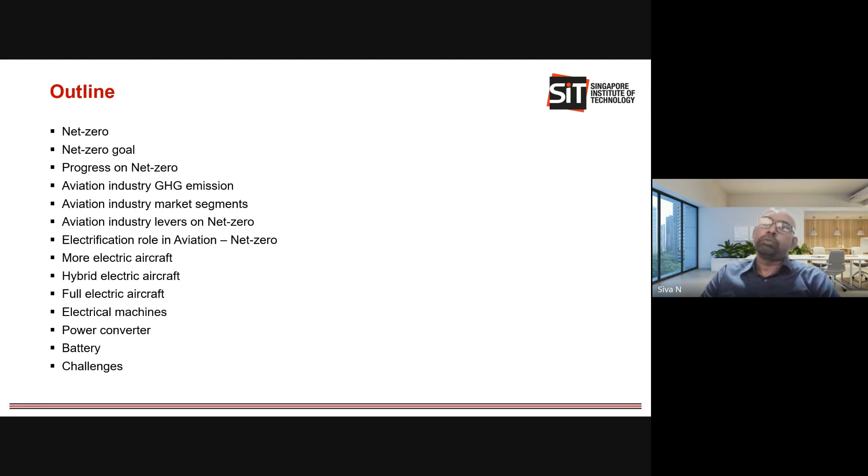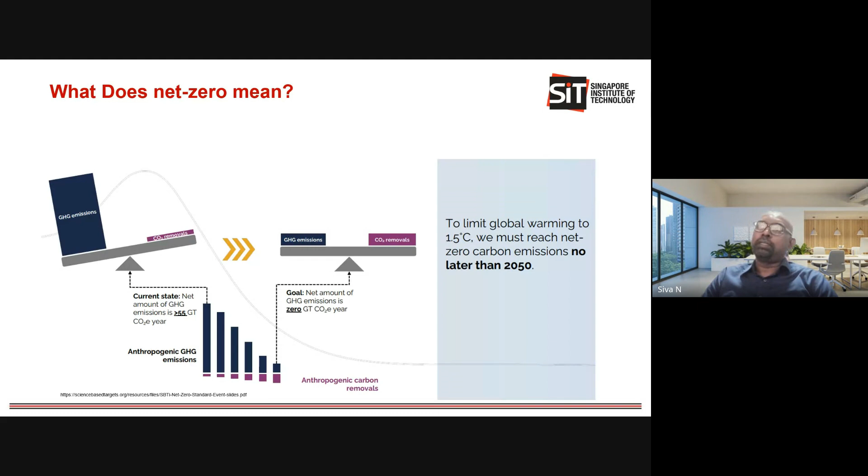Okay, so what does net zero mean? Net zero is basically, it's not really an initiative, it's kind of a pledge that countries, or globally, are being accepted to make. Net zero means the emission and the absorption are balanced.

So whenever I show this slide, I always use the analogy of a kitchen. Where we are now currently is somewhere here. If you look at the CO2 emission, the greenhouse gas emission is about 55 gigatons of CO2 equivalent per year.

So we are somewhere here. And then if you look at the amount of carbon being absorbed or removed from the atmosphere through natural means like the trees or forests that we have, it's very little actually. So the emission is really high, and the absorption or removal is really low. So this is a big imbalance that we have now.

So take an analogy: you have an enclosed kitchen with a small ventilation, maybe 10 centimeter diameter. And if you're using a wooden stove to cook your dish, when you burn the wood, what happens? It releases smoke, right? The rate of the smoke being released from the wood may be much higher than the rate the air is being ventilated through the hole. So eventually over the period, what happens? The kitchen is filled with more smoke.

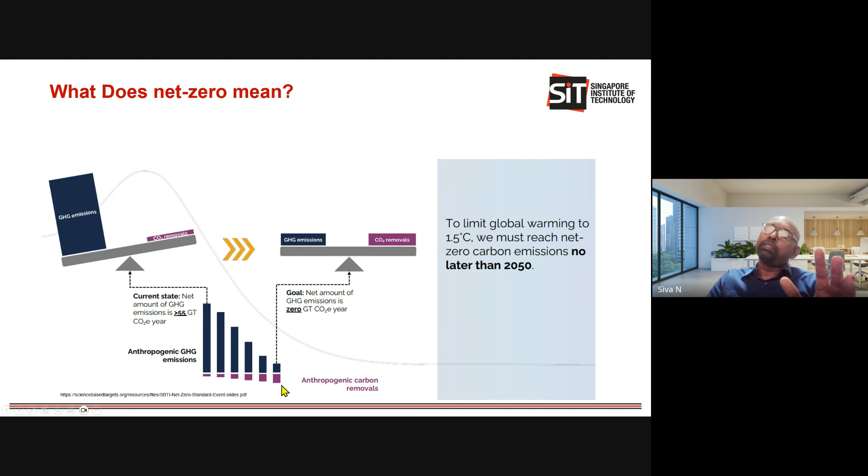So that's technology development: focus on technology to reduce CO2 emission, maybe by going to a completely different fuel or increasing the efficiency of the system. At the same time, also invest and focus on how we can effectively remove or accelerate the removal of CO2 from the atmosphere. So that's the transition we want to achieve in the next 15 years in order to strike the balance between emission and removal.

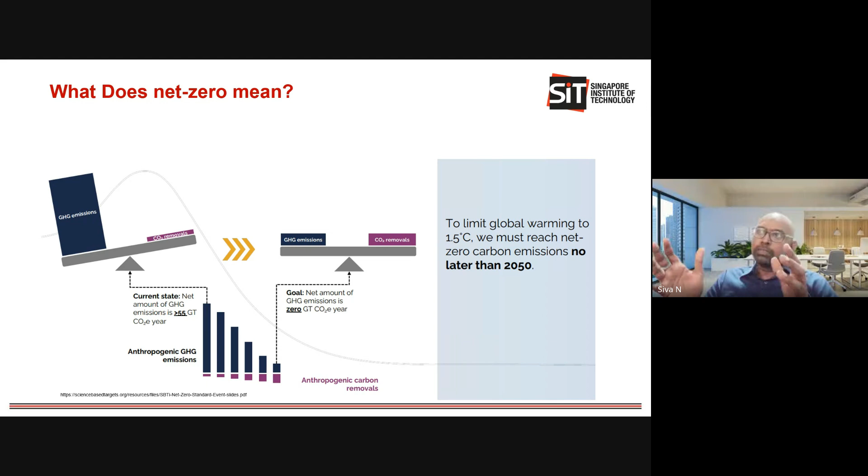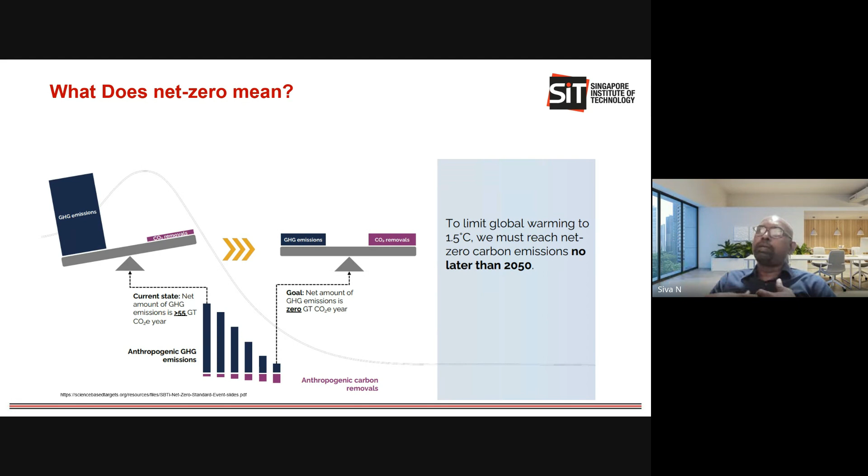Okay, so why are we doing this? Because we want to limit global warming to 1.5 degrees Celsius. Compared to the pre-industrial era, like 150 years back, the global temperature has already increased almost 1.45; I have a slide to show on that. If we're not taking any measures, the temperature rise would go higher and higher, maybe increasing by 2 or 2.5 degrees Celsius. That could create natural catastrophes that may be very harmful to the human race.

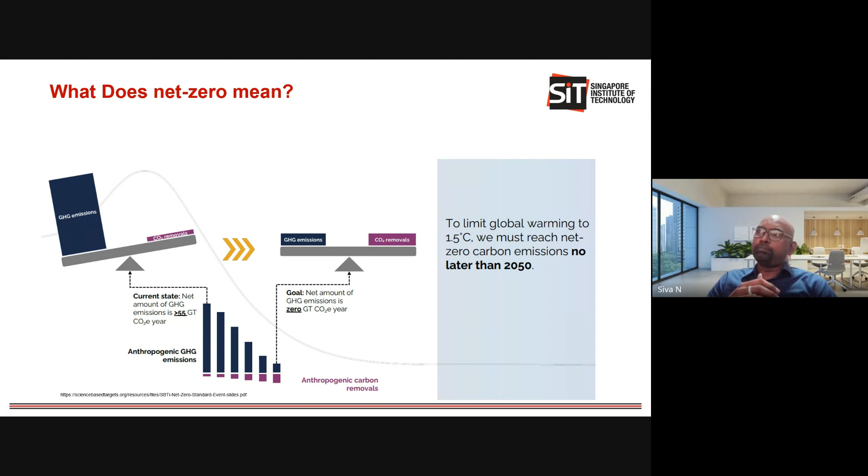So that's why, globally, countries have taken measures in order to achieve net zero by 2050, so that we can contain the increase in global warming to 1.5 degrees Celsius, so that we can prevent natural disasters in the coming years.

Okay, so the net zero pledge was taken in the Paris Agreement. It is actually an agreement that happened in a conference organized by the United Nations Framework Convention on Climate Change, which happened in 2015 in Paris. So that's why, in short, they call it the Paris Agreement.

So different countries and organizations came together and committed to address climate change collaboratively. And the aim, like I mentioned, is by the second half of the century to balance the greenhouse gas emissions and their removal from the atmosphere. So we want to strike the balance there. So the primary goal is to

limit global warming to 2 degrees Celsius, but 2 degrees Celsius is still harmful to the globe. So everybody is trying to focus on the stretch target, which is to contain the increase in global temperature, the global warming, to 1.5 degrees Celsius. So that's the target.

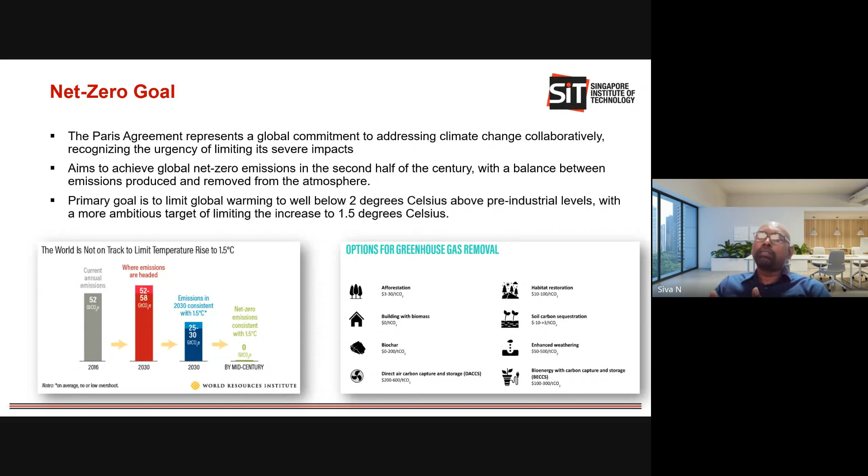One of the considerations to calculate the factor is what initiatives the company is taking for the environment. So if a company is not taking any initiative to achieve this net zero target, the ESG score is lower. If the score is lower, the company is categorized as not an investment grade company, so investors are not investing in those companies. They just try to stay away from them.

So in order to attract more investment, companies are trying to increase the ESG score. So they are looking at how they can contribute to the net zero target. So these are the reasons.

The other reason is a survey conducted on millennials, I think in the UK or somewhere. The millennials, the next generation workforce, are the ones going to contribute to society. And they say that if a company is not taking any measures on the removal of CO2 or not taking care of the environment, they're not interested in working for that company.

So it's alarming for industries and companies, because they see that if the new workforce is not ready to join them because they're not taking care of the environment, again, they see the downfall. So that's the other reason they want to give more focus to net zero. So these are some of the main key reasons, and there are many other reasons as well.

So if you browse any companies you're interested in or want to pursue a career with, go and read what their net zero goals are, and you can see there may be electrification. These are some of the things you should be aware of and know before you pursue a career in any industry or any company. Okay, so that's a brief background about why net zero and CO2 emission removal are important. You may be wondering, okay, on the previous slide I was showing, we have to strike a balance.

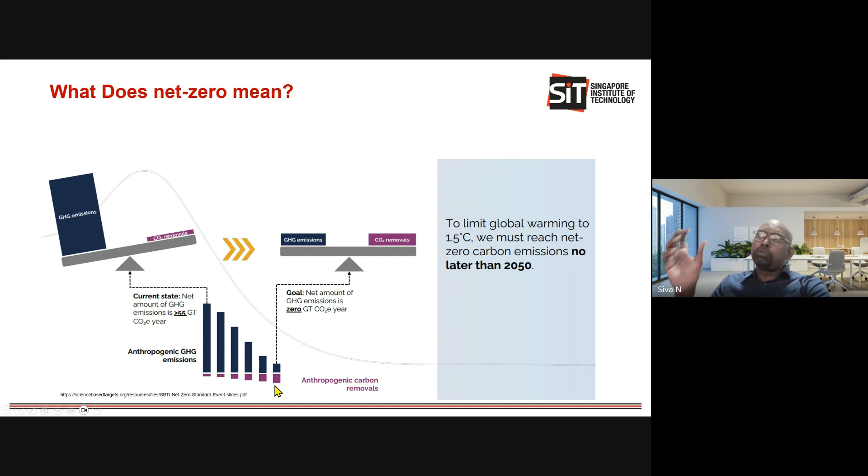So it's kind of going back to tradition. In the olden days, they used wooden materials to build houses. So using organic material in the buildings. We are basically putting the carbon in the building, and we are not releasing it to the atmosphere. And once the building is demolished, again, it's going to the earth. So you're keeping the carbon in the building itself; it's not being emitted to the atmosphere. That's one way. And another one is biochar.

Biochar is made when we burn organic material like wood at very low oxygen. The biochar is used to fertilize the land, or used as a catalyst, or used in filters. So it has many purposes. By converting the organic material to biochar, we are also reducing the CO2. So that can be a way of reducing or removing CO2. Instead of burning something and releasing the CO2, we are stopping that from happening. So that's considered a removal process.

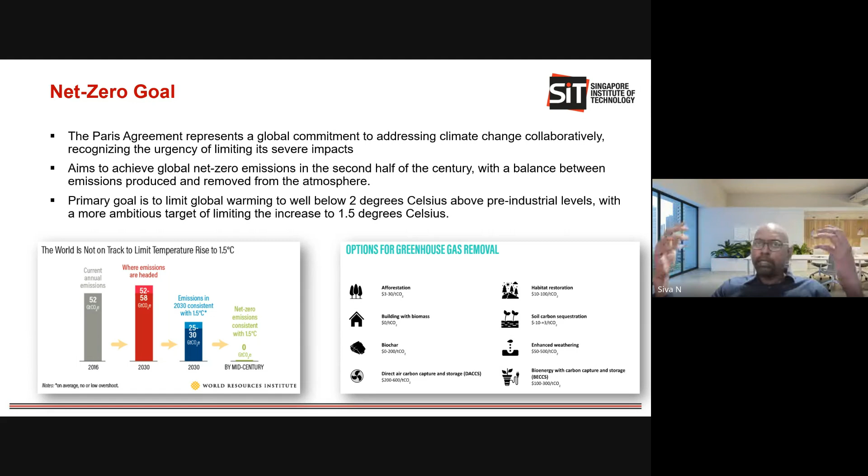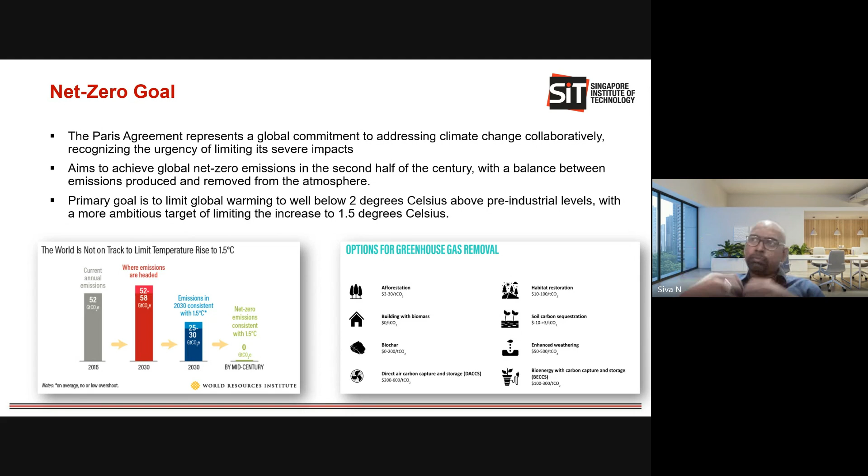And carbon direct air capture is a big topic again. There are many companies emerging now to increase direct air capture. In direct air capture, they put big fans to suck in air from the atmosphere, then they have a filter which filters out the carbon, and some solvent to dissolve the captured carbon. And this captured carbon is stored inside the earth. We drill a long hole and pump out petroleum to create fuel. This is a reverse process: they capture the carbon and pump it inside the earth and store it there.

So that's one way. Another way is bioenergy with carbon capture and storage. That is something like: capture the carbon, bring hydrogen molecules from the electrolysis of water, and combine the hydrogen and captured carbon to create a hydrocarbon chain, say a synthetic fuel, and then you can use it again. So that is another process.

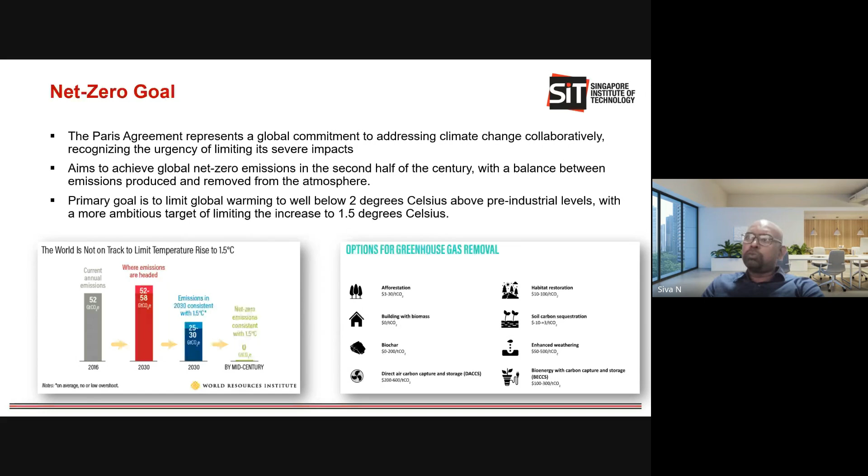And there are many other processes like enhanced weathering, where silicates and carbonates can absorb CO2 from the atmosphere. That's a natural, slow process, and the question is how we can accelerate the natural process of carbonates and silicates absorbing CO2. So these are different options available to remove CO2, and industries are looking into them to see how they can use them to accelerate carbon removal.

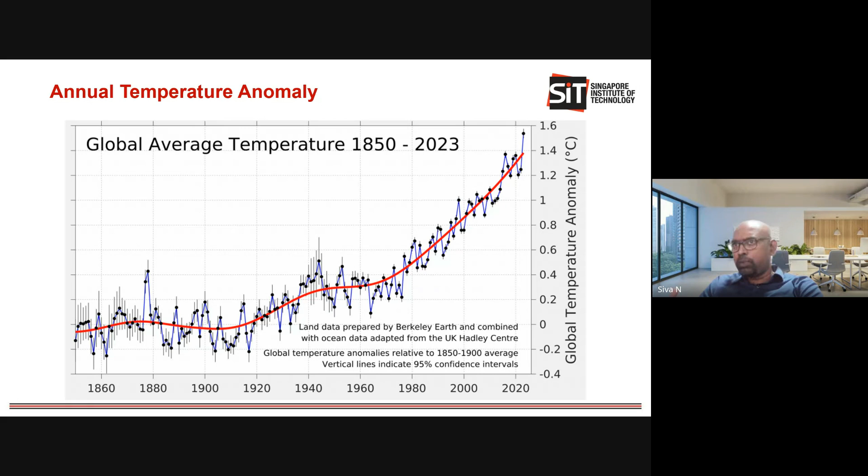So that's the reason that we are talking about this topic. Okay, so I explained why it is important and what the net zero target was, and now let's see whether it's important to achieving the net zero target, or whether the countries are serious about it.

Yes, as of June 2024, so far 107 countries, responsible for emitting about 82% of global greenhouse gas emissions, have already pledged to adopt CO2 net zero initiatives. You can see that there are many countries that already implement policies and laws to achieve this net zero target.

And some of the countries, our neighboring countries like Bhutan, claim that they are already net zero in the domestic sector. They already implemented policy documents to use only net zero fuel for domestic purposes. By doing that, they say that they already achieved net zero.

And Singapore, you can see, from all sectors except international aviation and shipping, wants to go 100% net zero by the second half of this century. So they already have policy documents in place. This is the government imposing policies to ensure that new vehicles, new means of generating electricity, or new means of operating equipment in industries reduce emissions. So the country itself is implementing laws and policies to achieve that, which is good.

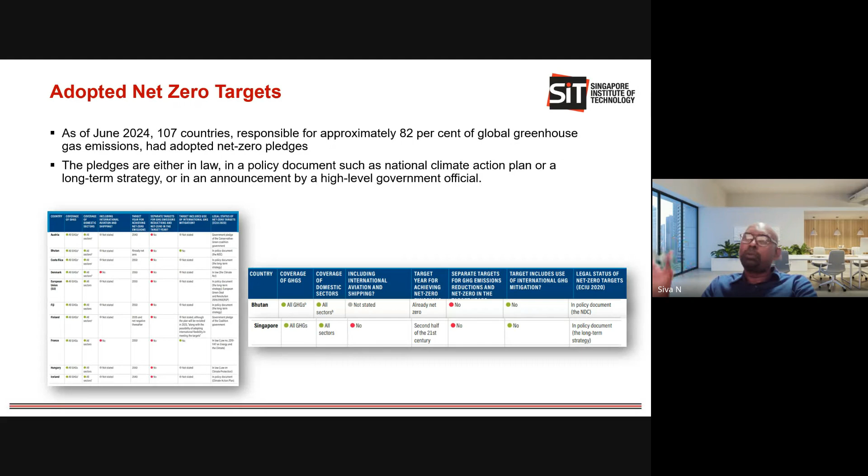So almost 80%, almost all the countries who contribute to CO2 have taken it seriously and are implementing policies, which is good. And to measure the progress, whether we are able to achieve net zero by 2050, they came up with 42 indicators to track progress toward the targets of 2023, 2030, and 2050. These 42 indicators are used to assess in what direction the globe is going to achieve the net zero target by 2050.

And if you look at these indicators, out of the 42 indicators, only one indicator is on the right track, which is the sale of electric vehicles. Whereas for the other indicators, some are in the right direction but off track, and some are in the right direction but well off track. It's very slow in meeting the milestones, basically. And some of them are taking a U-turn. They're going in the wrong direction.

For example, the carbon intensity of global steel production. Global steel production is supposed to reduce, because making steel uses a lot of energy, and most of it comes from fossil fuels. The milestone says global steel production must reduce CO2 emissions by this much, but actually it is increasing CO2 emissions compared to 2015. So that's why it says it is going in the wrong direction.

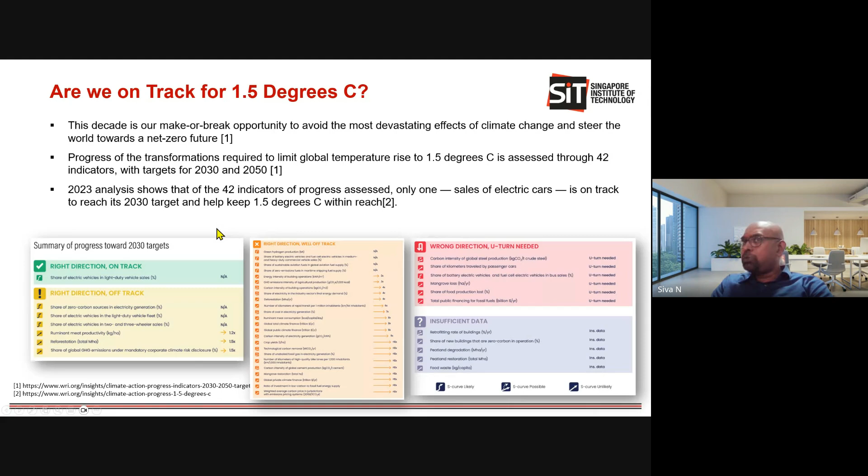So likewise, sometimes economic factors also drive this. So it's too hard to say who is right, who is wrong actually. So this is the status now. Out of the 42, only one milestone is on track, and the rest are either off track or, some of them, going in the wrong direction. So the next 15 years are very crucial to bring everything on track, and only if we bring it on track is net zero achievable by the middle of this century.

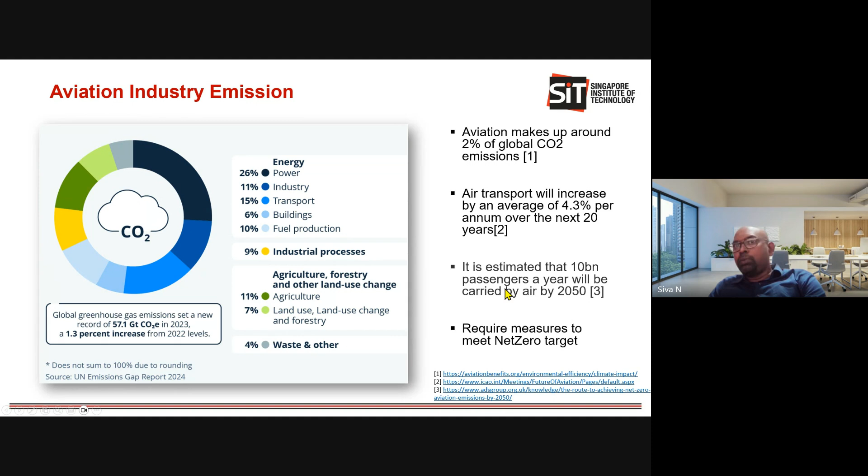It's important to look at what measures we can take to reduce emissions from the aviation industry and contribute to achieving the net zero initiative. It's estimated that about 10 billion passengers a year will be carried by air by 2050, a really significant number. The aviation industry is contributing 2% of global CO2 emissions, and that is going to increase as the growth of the industry is significant. So if you don't take any measures, aviation emissions will keep increasing, which is why it's important to take action.

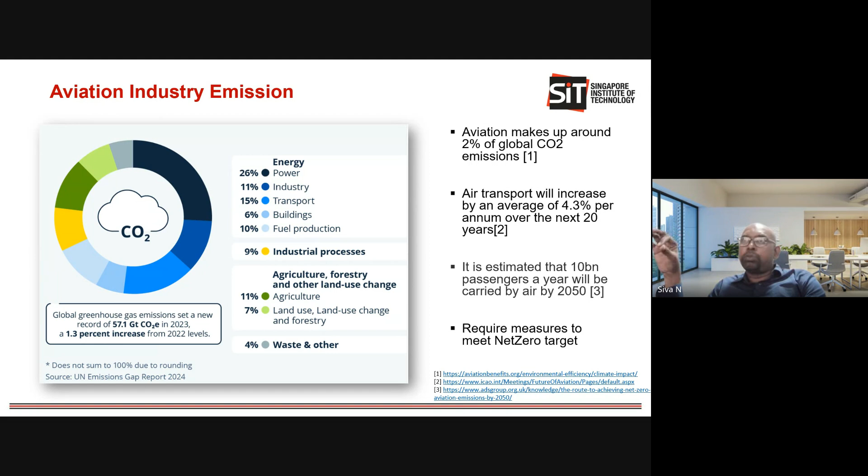Before looking at the measures the aviation industry has been taking in recent years, let's look at how the industry is categorized by market segment: UAM, commuter, regional, medium haul, and long haul flight. This is based on the size of the aircraft and the number of passengers it carries. The market uses this segmentation because the market is different for each of these categories, and the players—airlines and the OEMs supplying parts—are also categorized accordingly. This isn't fixed; some use four categories, some use five. Here I've taken the five-segment approach.

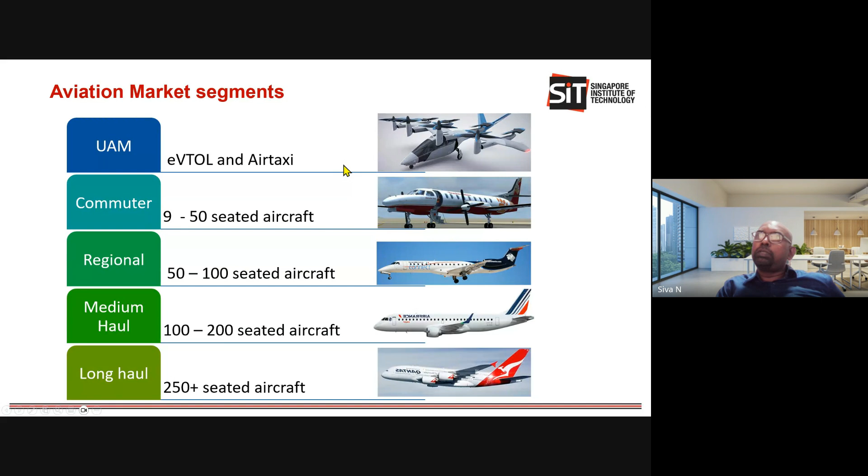eVTOL and air taxi represent a kind of emerging market now, whereas the others have been around for quite some time. Now let's see what initiatives have been taken to achieve this net zero target by UAM, commuter, regional, and medium and long haul flights.

To achieve net zero, there are measures—basically levers. The first is innovation with technology: adapting emerging technology to change how the industry operates, or how technology is used in aircraft to increase efficiency. Basically the focus is on improving fuel efficiency and adapting different sources for generating thrust, so that thrust can be generated with lesser or no CO2 emission. These are the kinds of technologies being looked into to reduce emissions.

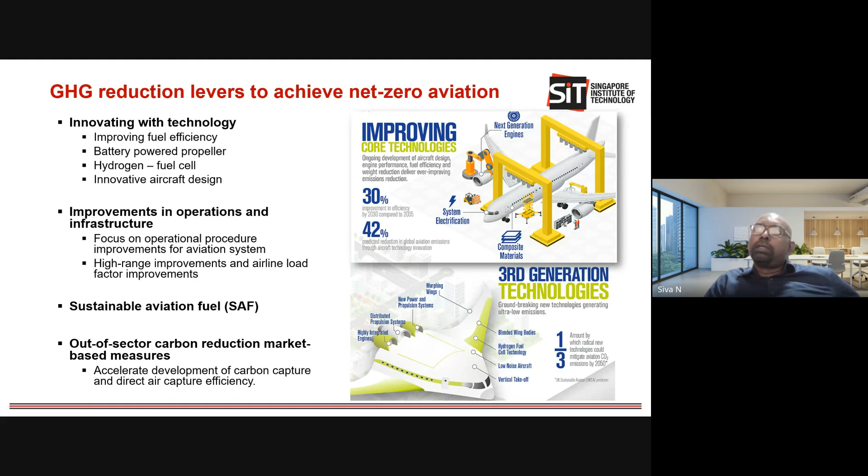The other lever is improvements in operations and infrastructure—an operational focus. If an aircraft is flying with fewer passengers, it's not generating revenue and isn't being fully utilized. If it's not fully utilized, the CO2 emission per passenger is higher. So one focus is improving the scheduling of aircraft so flights are fuller, improving utilization to reduce fuel burn per passenger. Another initiative is airlines coming together to share passengers and aircraft, increasing the utilization of their infrastructure.

Sustainable aviation fuel is another big topic, because long haul flights can't be 100% electrified. So we have to do something with the fuel so it emits less CO2. This sustainable aviation fuel is a big topic by itself—there are various fuel options to achieve net zero, like using feedstock such as biomass or palm oil to create fuel. If you get fuel from plants, the plant absorbs CO2, and when you use that as fuel and emit CO2 back into the atmosphere, the plant absorbs it again—a carbon neutral cycle. That's one way of using biomass.

Another approach uses electrolysis, like the Fischer-Tropsch approach: using fans to capture carbon from the atmosphere, then using renewable electricity to break down water into hydrogen and oxygen molecules, and combining the hydrogen and carbon to make a hydrocarbon chain to create a synthetic fuel. There are many methods that fall under sustainable aviation fuel.

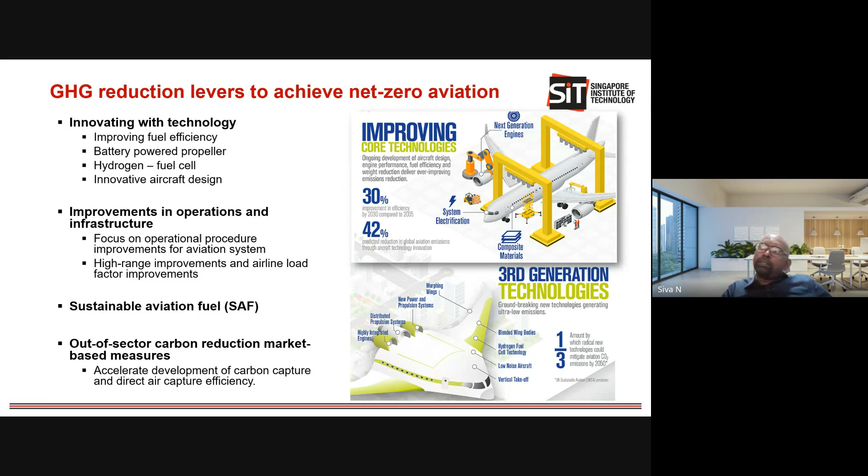That's a big topic by itself, I'll talk about this a bit later. There's also the out-of-sector carbon reduction market, kind of a carbon credit sort of thing. So whether airlines can invest in carbon capture or direct air capture technology to increase efficiency, so the amount of carbon they emit can be captured back, either putting it in the ground or using the carbon to do something useful. That helps to neutralize the carbon.

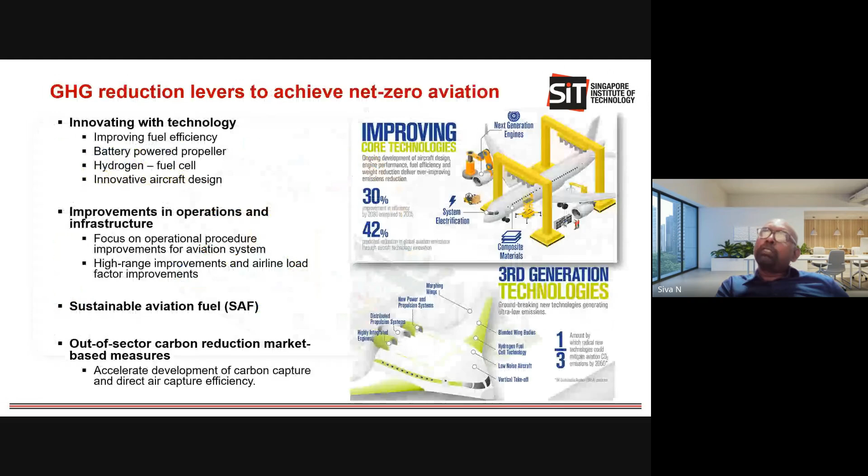So this is a passive approach, whereas these others are active approaches of reducing CO2 emission. Now let's look at this in more detail. The first approach is innovation, innovating with technology. So what innovations have been looked at?

If you look at aircraft, the fuel consumption is based on its weight. So by reducing the weight of the aircraft, you need less fuel to fly it, which increases the fuel efficiency. The industry is looking at composite materials to make the aircraft body lightweight, and by making the body lighter, we need less fuel to fly, increasing fuel efficiency.

Then electrification plays a significant role, because hydraulic and pneumatic systems are widely used in aircraft, and these add weight. By replacing hydraulic and pneumatic systems with electrical systems, we would be able to save weight and space in the aircraft. If we save space, we can accommodate more passengers.

So these are some of the measures, and also next generation engines. Engine manufacturers like Rolls-Royce, GE, Pratt & Whitney are investing a lot of money on improving engine efficiency. For example, if they increase engine efficiency by 1%, that creates savings of millions of dollars for airlines per year, per aircraft potentially, leading to significant savings on fuel burn.

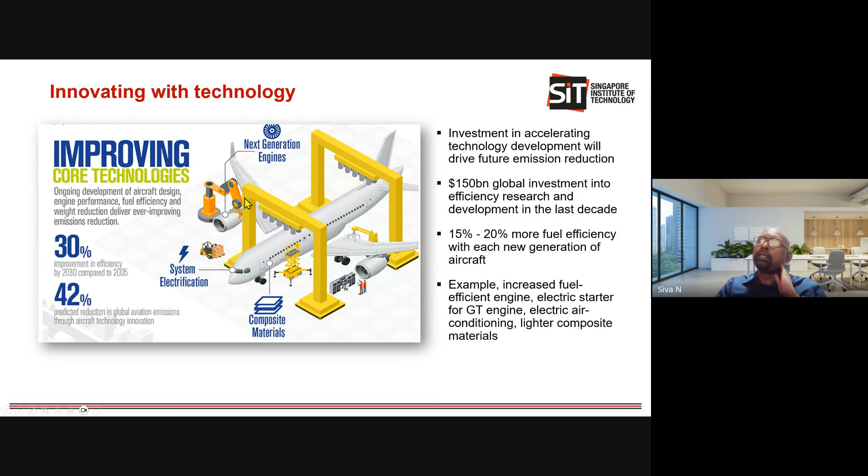Now, as most of us are electrical engineers, let's see how electrical technology is contributing in achieving net zero in aviation.

But still, it's really significant. We cannot have carbon capture technology to absorb this much CO2. So we have to reduce it.

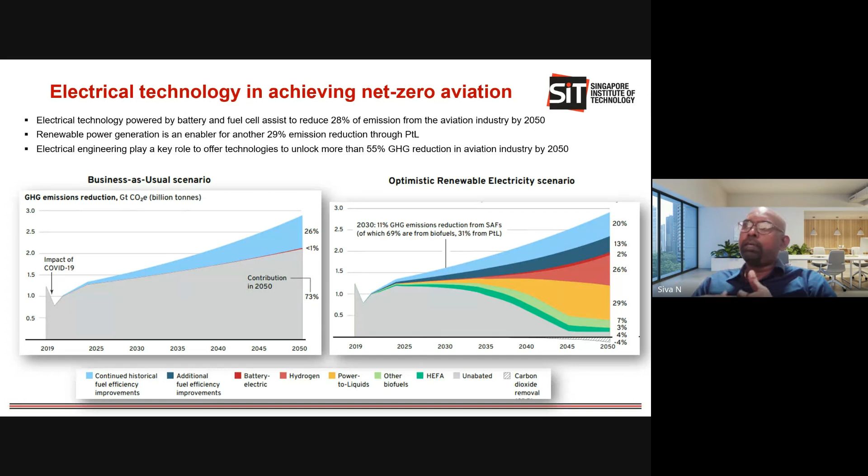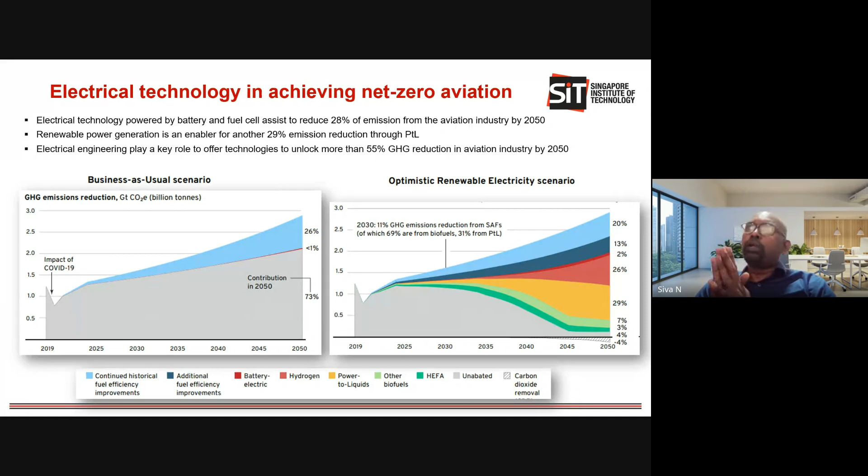So as electrical engineers, we have a big role to play here. We have to either contribute directly by replacing conventional combustion engines with electrical propulsion for battery or fuel cell aircraft, or by increasing the efficiency of existing aircraft by adapting more electric technologies—I'll talk about that later—by replacing some existing systems like hydraulic and pneumatic ones, or by making a significant contribution to increasing the production of renewable power. Only then is it all possible. So electrical engineering is going to play a significant and crucial role in unlocking 55% of the global greenhouse emission reduction in the aviation industry by 2050.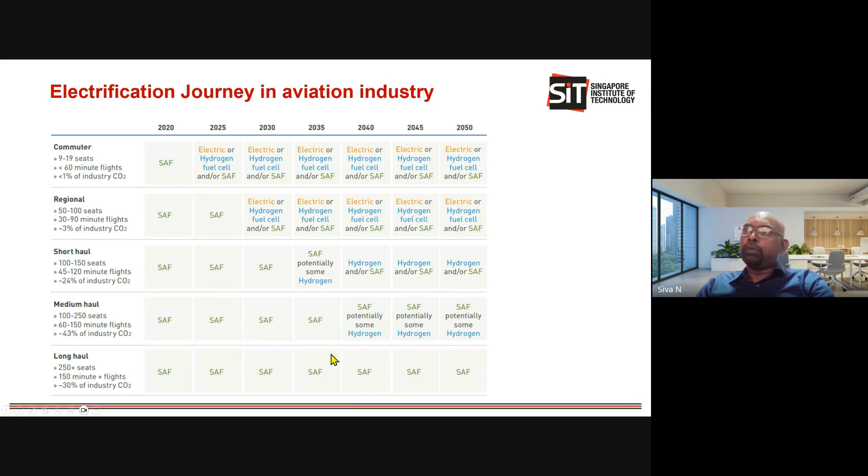Regional aircraft, which are slightly bigger, may be able to use hybrid electric and fuel cell technology to fly. This may happen from 2030 onwards. Then short haul, medium haul, and long haul aircraft will need to rely on sustainable aviation fuel and hydrogen—here electrification helps a little, but not significantly. We have to rely on sustainable aviation fuel or hydrogen as fuel to achieve that, whereas for commuter and regional aircraft, electrical propulsion is going to play a significant role in reducing carbon emissions.

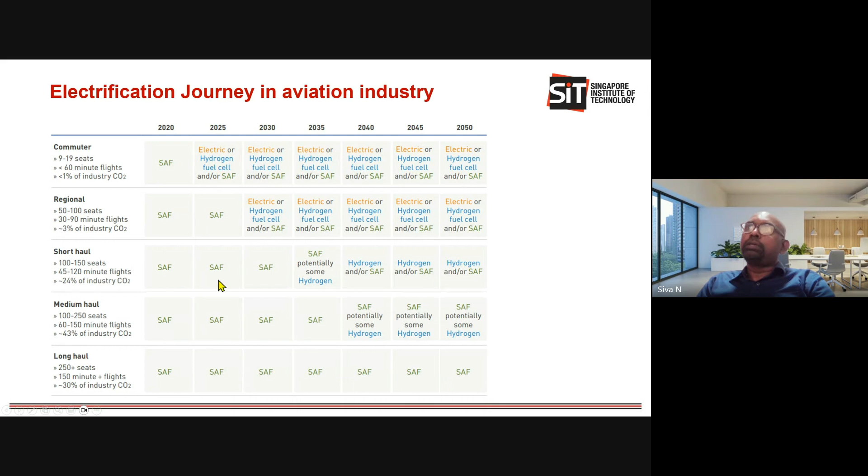So for aircraft electrification—how electrical technology or electrical engineering is going to assist in reducing emissions across all market segments of the aviation industry—let's take the more electric aircraft concept. This is mainly for long haul or medium haul aircraft, which are bigger aircraft that fly from one continent to another. These aircraft are huge, and it's difficult to completely change them to full electric or hybrid electric.

So here what we can do is replace some of the hydraulic and pneumatic systems with electrical ones. For example, in the gas turbine engine there are many stator vanes in the compressor and turbine blades, and the angle of attack for those blades needs to be adjusted. For that, they use hydraulic actuators. There are many initiatives in industry to replace this kind of system with electric.

And the other approach is to start the aircraft electrically. I think I have the slide here—maybe I can move to that slide. Yeah, more electric aircraft.

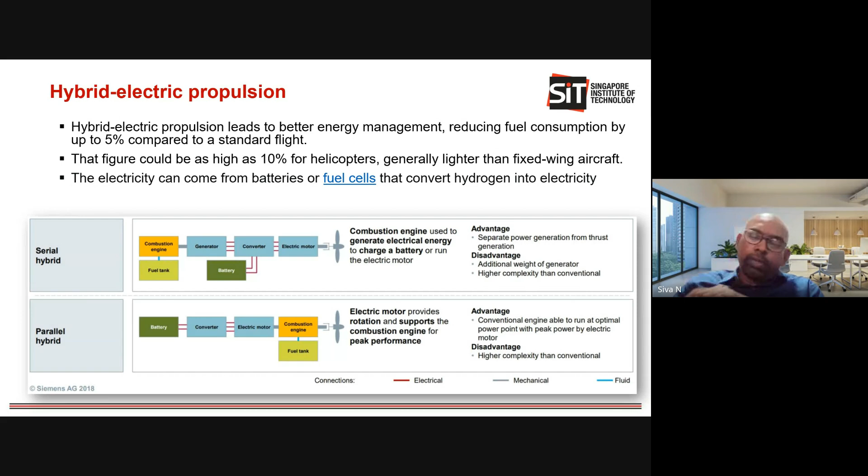And then again, two categories of the hybrid system: serial hybrid and parallel hybrid. In serial hybrid, the motors are used for propulsion, and the engine is used for generating electricity, and the motor is powered by the electricity generated by the engine as well as the battery. In parallel hybrid, the combustion engine is the primary source of power, and the electrical motor is used to provide additional torque to the combustion engine to generate more thrust to fly. Okay, so that's the hybrid option, and these are some of the demonstrators.

So companies like Airbus, Rolls-Royce, and Siemens all came together to build this demonstrator. In this demonstrator, Siemens provided the motor and the power converters for the propulsion. Rolls-Royce is good at designing engines, so they provided the small gas turbine engine, primarily to generate electricity. That drives the 2 megawatt generator, and they also provided the power converter. And Airbus provided the cockpit HMI, the control system, battery, and so on.

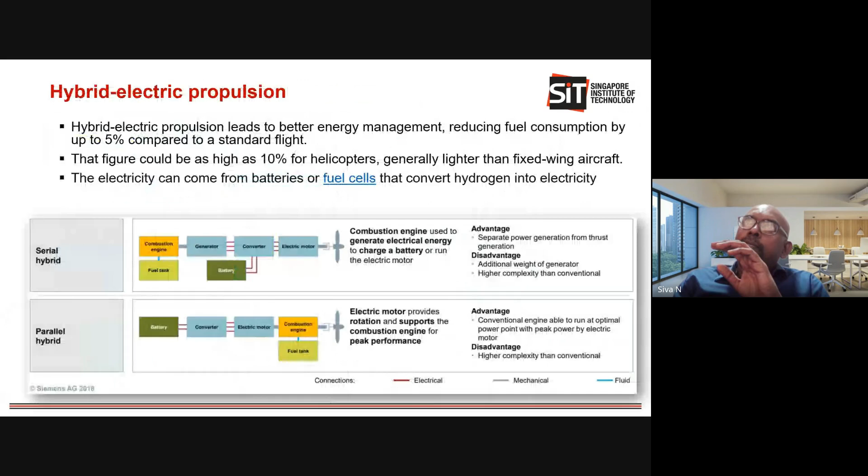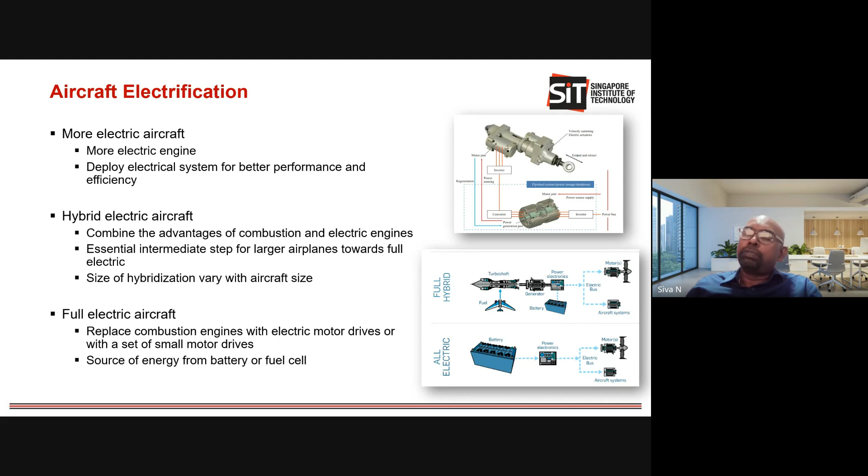And then, the third category of focus is, let me go back to the slide. Yeah, so I talked about the more electric aircraft, how electrification helps increase efficiency and reduce CO2 emissions. For hybrid electric, I talked about the companies coming together and demonstrating the concept, which will contribute to 5 to 10% fuel savings. And then full electric aircraft, that's what we're going to talk about.

The full electric aircraft is mainly for the urban air mobility industry, for the air taxi, which flies about a 35 to 100 kilometer range with 6 to 10 or 12 passengers. That is the urban air mobility market. Because with existing technology, we are only able to 100% electrify these aircraft, not the regional aircraft where 90 or 100 passengers travel, or the long-haul aircraft where 200 or 300 passengers travel. So with current battery technology, we would only be able to fully electrify small aircraft.

Okay, so why? This is again a big topic. Urban air mobility is an emerging topic, and it's been in the spotlight for the last 5 years. The reason is that the United Nations predicted that by 2050, 2/3 of the world population will live in cities. You can imagine that even now the cities are really crowded, and during peak hour, land transport is crowded and congested. So the infrastructure is really stretched.

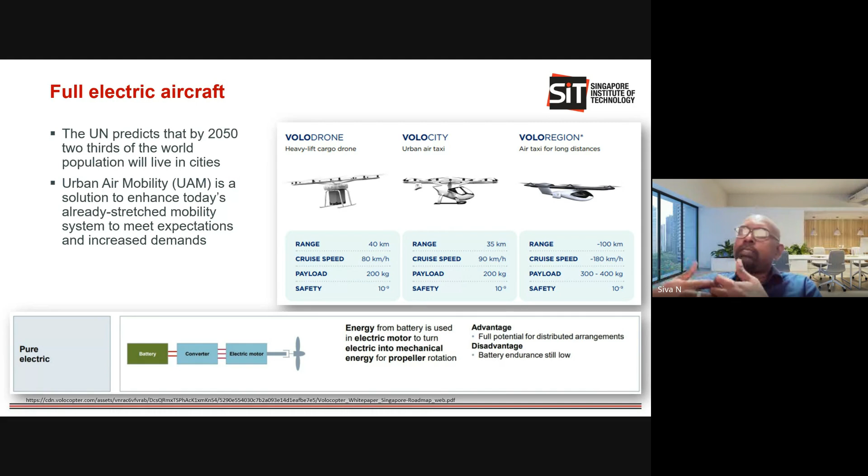So imagine that in 15 years, more and more people are migrating to the city, and the city is going to get really crowded. The land transportation is already stretched, so we have to look at the alternate option. The alternate option is the air taxi. There's a belief that this air taxi market is going to boom in the next 15 years. That's why many companies and startups are looking to develop electric air taxis for urban air mobility.

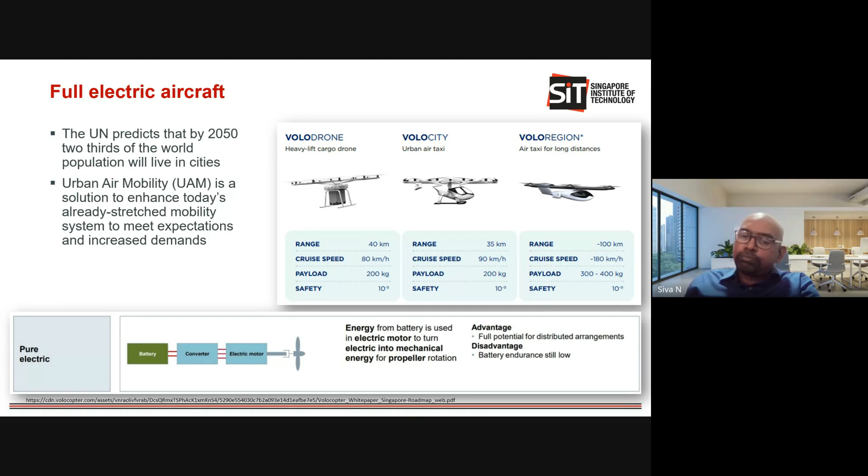Okay, so if you look at the full electric aircraft, the three key components are the electrical motor, converter, and battery. Electrical machines in general can achieve more than 95% efficiency, compared to the combustion engine, with efficiency of around 50% or below. So electrical motors are definitely efficient, but aerospace applications always have constraints. The two key constraints are weight and space. So, weight constraint: how we can reduce the weight of the electrical machine.

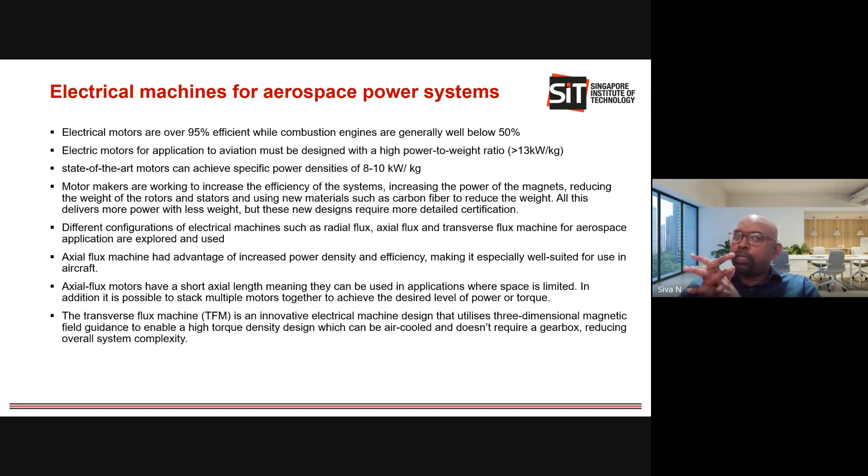So that's a primary focus on selecting or building the electrical machine for the aerospace application. Currently, the state-of-the-art motor can provide a power density of 8 to 10 kilowatts per kilogram. But if you want to use electrical motors for aerospace applications, the power density should be in the range of more than 13 kilowatts per kilogram. So that is like a 30 to 50% improvement in power density required.

So the industries, as well as the main OEMs, the original equipment manufacturers, are looking at various options of increasing the efficiency and power density of the machine, the motor. They're looking at technologies like increasing the power of the magnet, reducing the weight of the rotor and stator by using new materials like carbon fiber, and also other options like the machine topology itself. The radial flux machine is what is widely used. Can we go with other options like the axial flux machine and transverse flux machine?

The axial flux machine has various advantages. In the conventional machine you have a fixed stator and fixed rotor, whereas in the axial flux machine, if you want more power, we can stack the rotor and stator stages, right? So that provides modularity. If you want to increase the power, you can do it by stacking and adding rotors. It also reduces the weight of the machine.

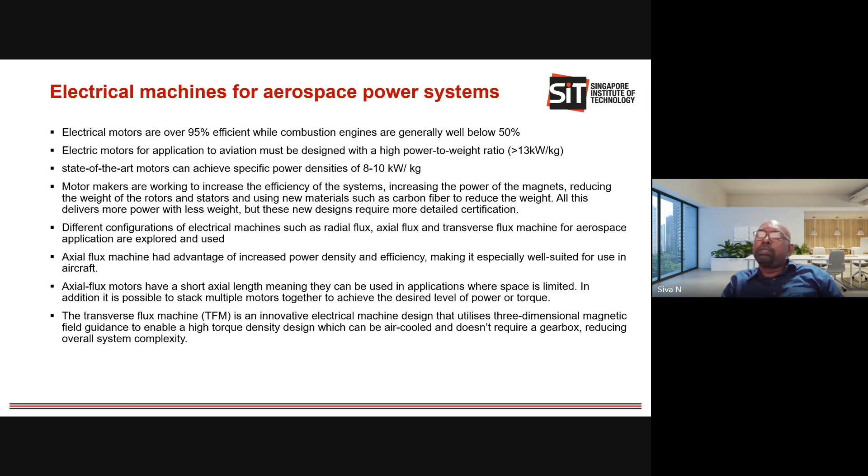Axial flux machines are currently being designed and developed, and some manufacturers already claim they have a product suitable for aerospace applications. The other configuration is the transverse flux machine. In the axial flux machine, the flux is in the axial direction. In the radial flux machine, the conventional, widely used machine, the flux goes in the radial direction. But the transverse flux machine's flux is a combination of radial and axial, which provides a three-dimensional magnetic field.

The advantage of this is that the windings can be exposed in this machine configuration. They don't need to be inside the stator slots. If they are exposed, they are easy to cool. Because when it comes to the power density calculation, they also consider the cooling. For example, you have a very high power dense electrical machine, but if this machine is liquid cooled, the power density calculation counts the machine weight as well as the coolant, cooling pipes, and cooling system weight, everything put together.

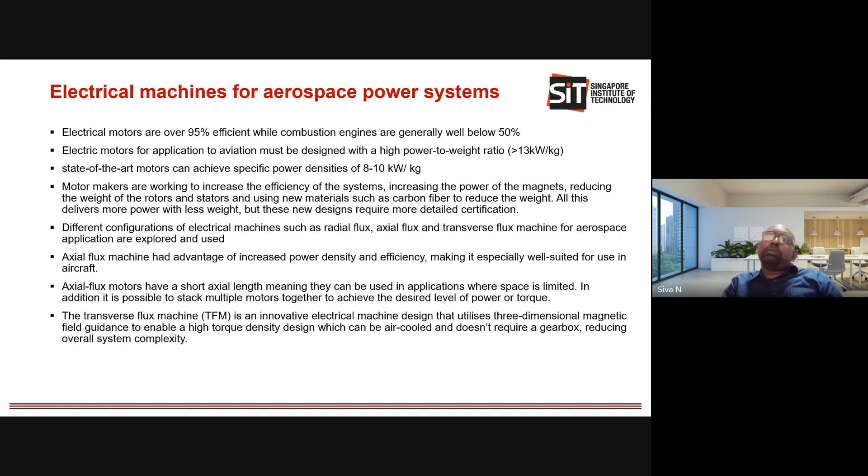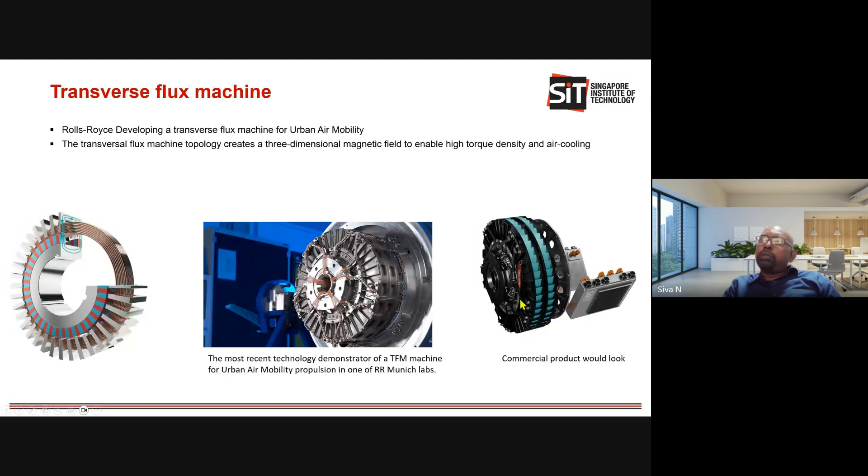So even if you develop a high power dense machine, when you include the accessories or the cooling system weight, the power density is reduced. If you use an air-cooled machine, the power density can be maintained or increased. That's the advantage of the transverse flux machine. This is the transverse flux machine currently being designed and developed by Rolls-Royce for the urban air mobility market. You can see how the flux goes three-dimensional. This is a prototype they have, and this is how the commercial product would look. They already built the first prototype and are currently testing it.

And then the axial flux machine. magniX is one of the OEMs. They developed a propulsion motor using the axial flux topology. They have a 560 kilowatt machine.

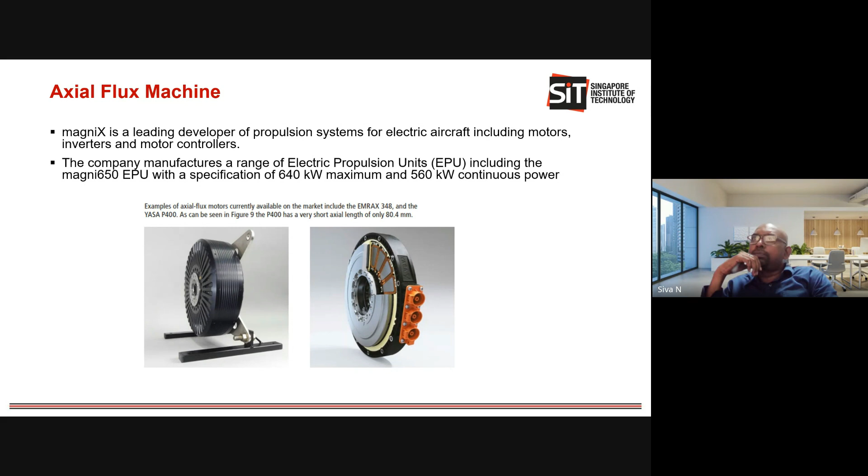And then the power converter is another key building block in the more electric aircraft and full electric aircraft. Again, for aerospace applications, the power density of the power converter is important.

Generally, the power converters are quite power dense, but the power converters are the weak link in electrical drives. Because with an electrical machine, even if it has a fault, the machine can operate for some time, right? Whereas with a power converter, if one device fails, the power converter becomes imbalanced and may not be useful, right?

Especially in the aerospace application, which is considered safety and mission critical. This means that if an aircraft leaves airport A, it has to safely land at airport B. If anything goes wrong or fails in this mission of going from A to B, it could be catastrophic, and it could jeopardize the safety of the crew and passengers. So it has to be reliable.

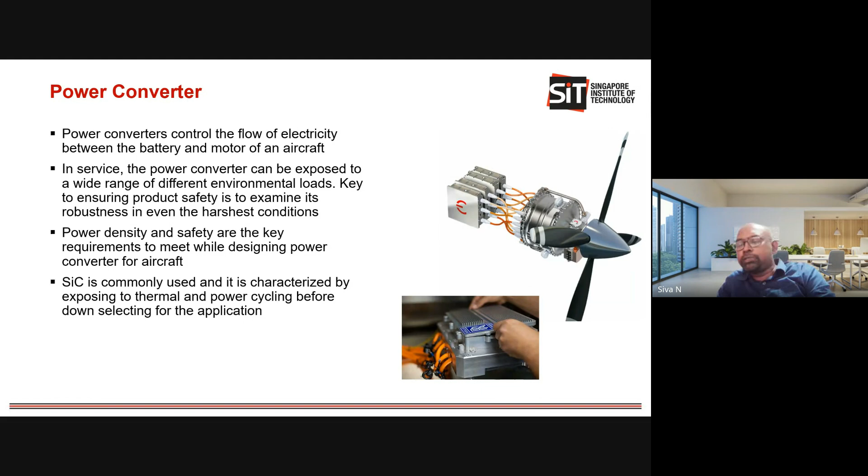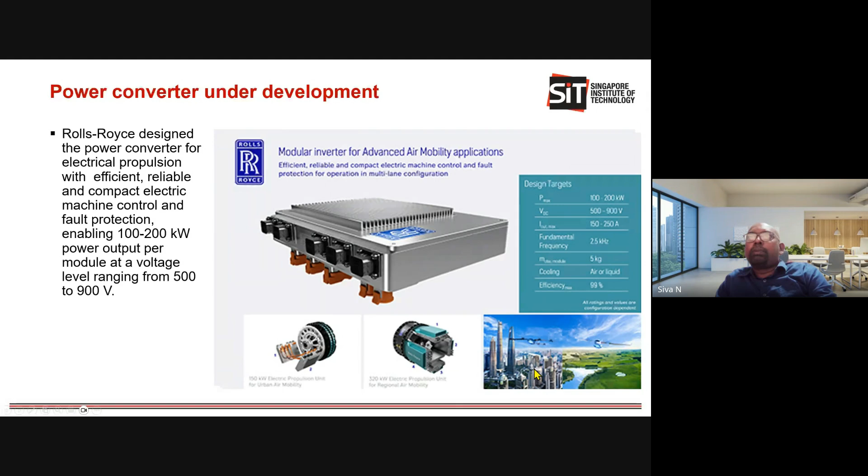On the battery side, the battery is actually a big hurdle for urban air mobility. Five years back, many companies started with the big ambition of developing aircraft for urban air mobility. But I think at least half of them slowed down their research because they realized the battery technology is not there now to commercialize urban air mobility aircraft, the air taxis.

The current battery technology provides an energy density of 250 watt hours per kilogram. With this, they can power small 4 or 6 seater aircraft. But if you want to power slightly bigger aircraft, the density is not there in the battery. So the companies are waiting for the next generation of batteries to provide significant power density and safety to realize aircraft for the urban air mobility market.

Power density is one thing, and the degradation that happens is also higher. As I mentioned, the aircraft comes with a weight constraint, right? To keep the weight lower, full electric aircraft are designed with less battery capacity. Then for takeoff and landing, the propellers are drawing power from the battery at a very high C rating, like 6 or 7 times the rating of the battery. So 6C or 7C are being used.

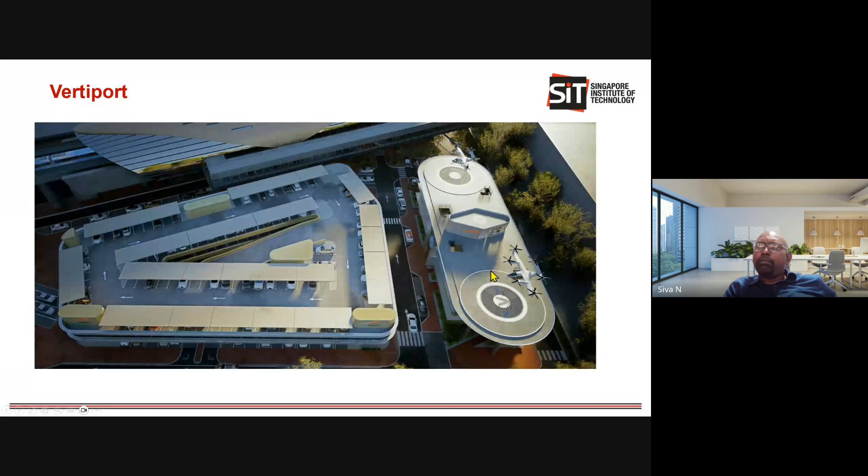So again, to charge the electric aircraft, there are many companies; Skyports is one of the companies setting up these vertiports in the United Arab Emirates as well as in Singapore to fly these full electric aircraft. They take the electricity from the grid to charge the electric aircraft, or it's a renewable integration, where they take the electricity from solar or wind to charge the batteries on board the vertiport, and then use the battery storage to charge the aircraft. So those are the different options they are adopting or exploring in order to charge the electric aircraft.

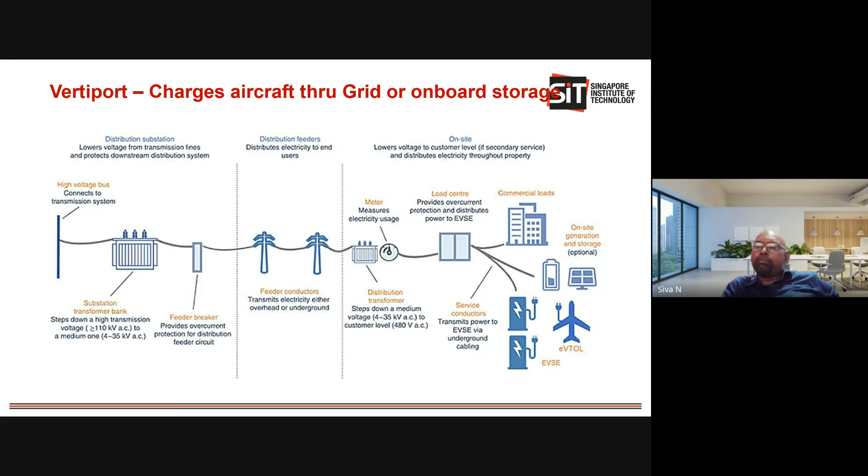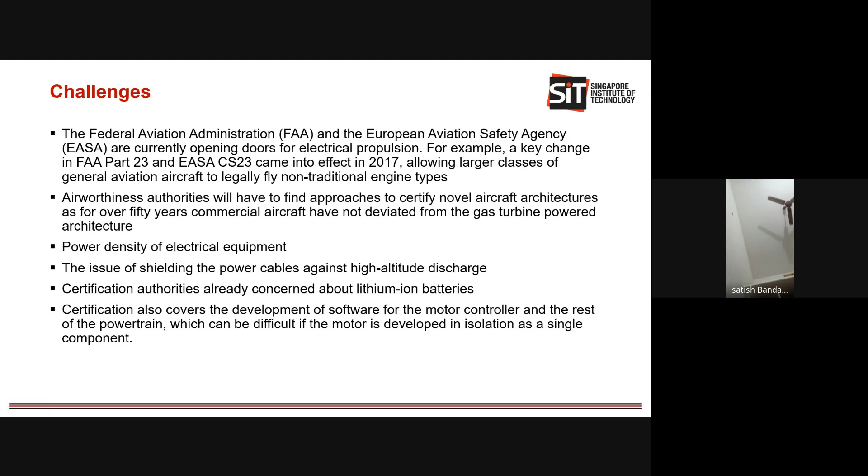So I talked about the full electric aircraft, and then what's happening on the electrical machine technology, power converter, battery, and the vertiport. Now let's look at approval, because without the approval, the electric aircraft cannot be commercialized, because there are many aviation authorities. For example, if you want to fly the aircraft within India or within a state in India, there are the local aviation authorities. They can provide approval and you can fly the demo flight of the full electric aircraft.

But if you want to commercialize for global use, there are two aviation authorities. One is the Federal Aviation Administration, FAA, and EASA. So these are the two authorities or agencies. They provide the guidelines and standards for designing and developing the aircraft. Currently, these authorities have the standards and guidelines for developing the components for the existing aircraft, like wide body aircraft or commuter aircraft, which are powered by engines, basically. But for the electric aircraft, they are currently implementing the standards and coming up with the guidelines.

Which is good news, because when this market was being picked up sometime in 2015 or 2016, the FAA or EASA were not looking at the standards for the full electric aircraft. But now from 2017 onwards, they started looking at it, drafting the standards and guidelines for the non-traditional aircraft, which is the full electric aircraft, which is good news. But still, it's not easy to certify an aircraft, because maybe we can come up with a very wonderful design to increase the power density of the electrical machines or the power converter, but

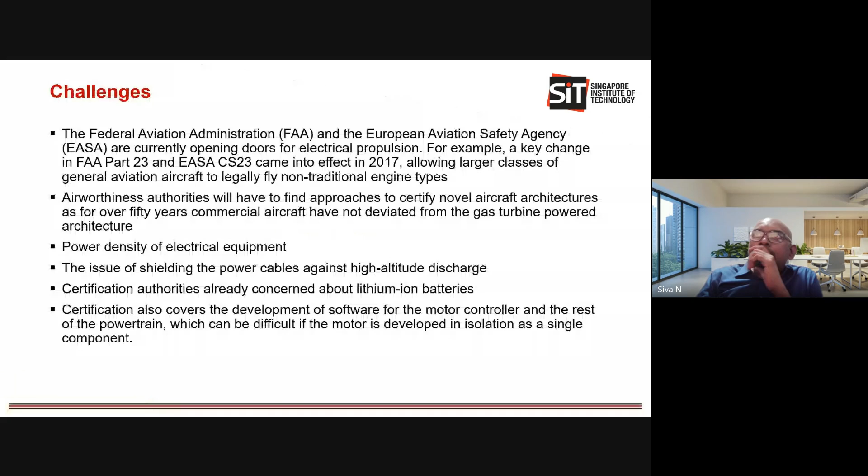And then there's the concern about lithium-ion batteries and high C discharge onboard during takeoff and landing. So these are the kind of concerns, and authorities are still trying to understand how they can wrap standards, regulations and guidelines to assist the OEMs and airframers to design and build the aircraft, so they can qualify to fly for commercial purpose. So these are some of the challenges to highlight in commercializing the full electric aircraft.

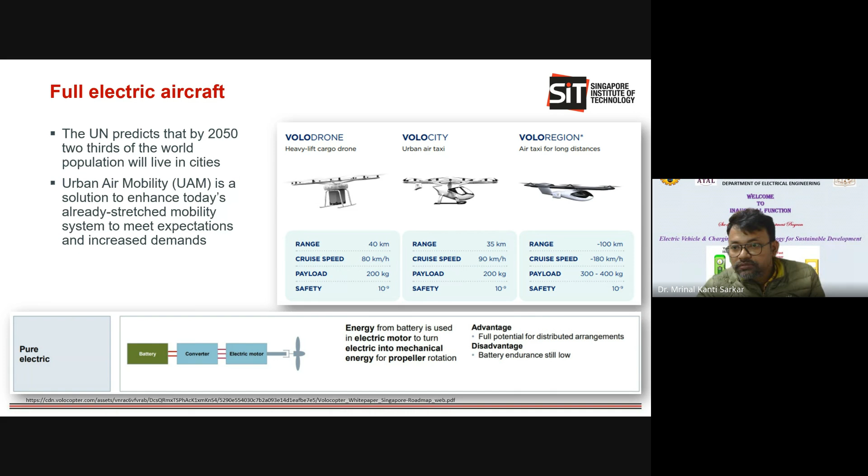Sir, good evening. Actually, my question is, you told about the de-icing of the exterior of the plane. So which type of heater and where it will be placed? You told electric heaters will be used for this, and how to place them?

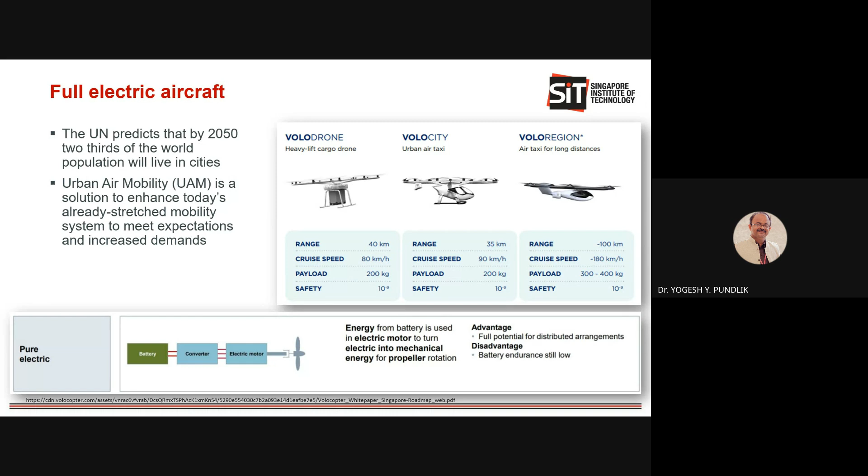I'm not sure any aircraft is using electric heaters now, but I can explain what is currently being done in the conventional aircraft. The APU, a small auxiliary generator engine, is also coupled to the generator. This engine pumps hot air because it runs at high temperature. So this hot air is pumped to the tail and then the wings, as well as on the windshield, near the pilot. This hot air is basically used to melt the ice deposited on the wings, tails, and windshield.